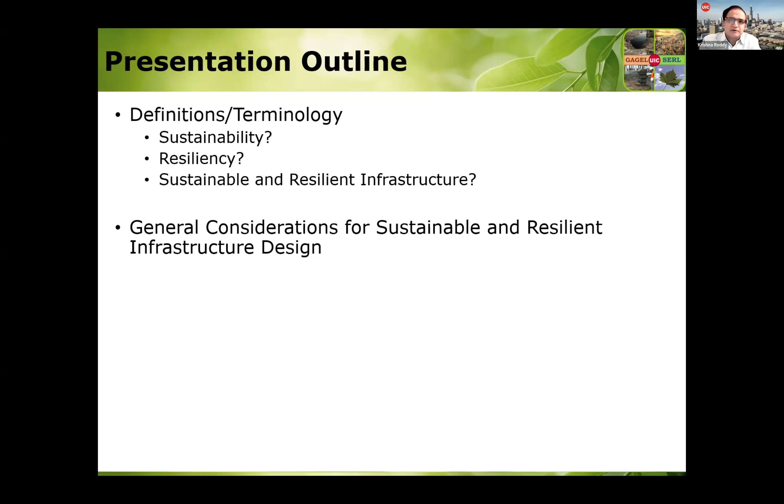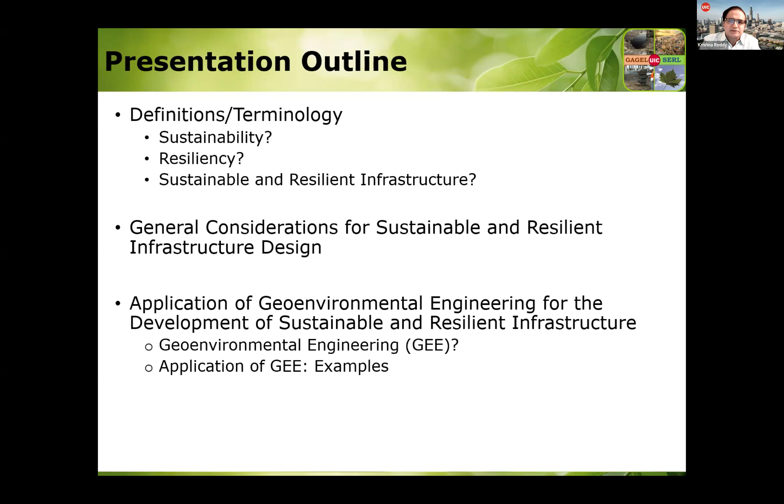Then I'm going to briefly mention the general considerations for sustainable and resilient infrastructure design. After that, I'll focus on how geoenvironmental engineering can be applied towards sustainability and resiliency in infrastructure. I'll explain very briefly what geoenvironmental engineering is, and then give you several examples of how it can be applied towards sustainable and resilient infrastructure. Then I have a brief closing comment. So this is the agenda.

So, sustainability - what is the definition of sustainability? In one of my papers, I have given more than a dozen definitions of what sustainability is, and you can find many more than that. But the one that people use commonly is this definition, which I think everybody knows: meeting the needs of the present without compromising the ability of future generations to meet their own needs. This is very brief, succinct, and very powerful, but it does not really tell what needs to be done to achieve this.

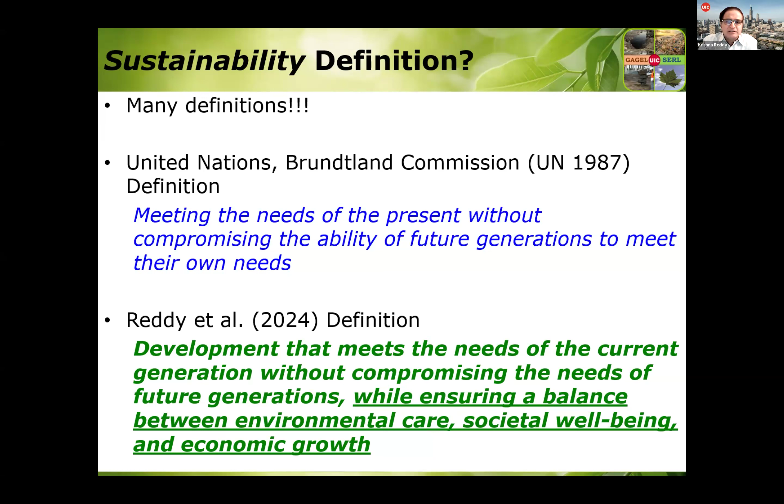So what I did is add the last part that I underlined, so you can achieve it: meeting the needs of the current generation without compromising the needs of future generations, while ensuring a balance between environmental care, societal well-being, and economic growth. In order to accomplish that broader goal, you need to balance these three aspects: environment, society, and economic. This is popularly known as the triple bottom line. I'm sure you have seen the Venn diagram that shows all three elements, basically optimizing the positives of all three.

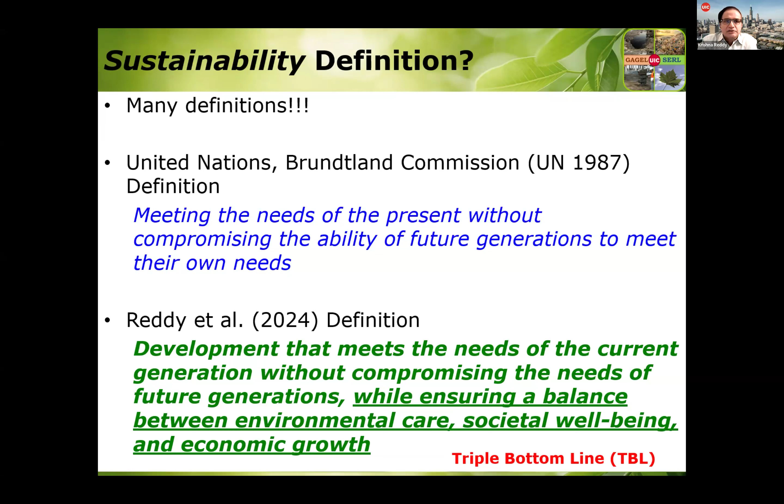So why are we so concerned about sustainability these days than before? We have all these issues: natural resource depletion, growing environmental pollution, increasing population, increasing waste generation, increasing greenhouse gases, declining ecosystems, loss of biodiversity, social injustice, urban sprawl, and many more. All these things are getting worse and worse as time passes, so we cannot let this situation continue. Conditions for current generations are becoming difficult, and it's definitely going to be a very problematic situation for future generations.

So that's where the concept of sustainability comes into the picture, and the UN has developed Sustainable Development Goals. They said, hey, we need to address these issues and should aim to do something. They specified 17 goals, with specific targets under each goal, and you can monitor country-wise how these targets are being achieved. This gives us a good framework at a global level on what can be done towards sustainability and reverse the problems we have been having. So quantifying sustainability is very important, because you just don't want to say whatever I'm doing is sustainable.

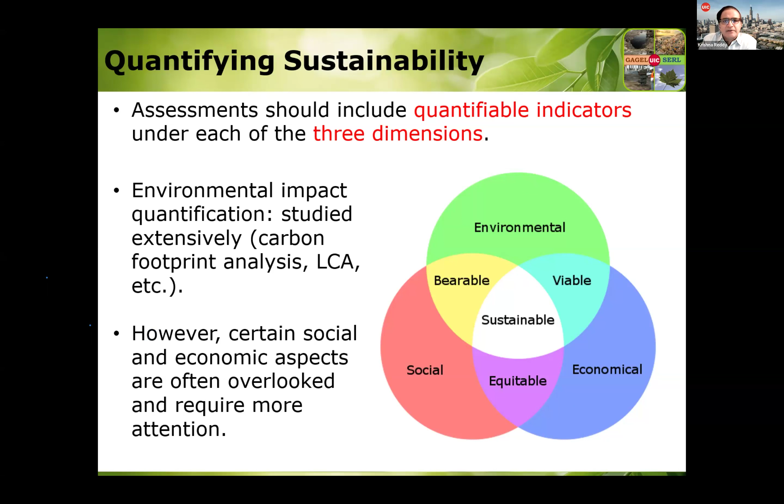So our research is aimed at developing the frameworks and identifying the indicators, identifying the metrics, and how you combine all of them into what's called a sustainability index. I'm not going to talk about that here, but you can look at my papers that show the framework and how you quantify sustainability.

So let's look at another buzzword that people use: resilience. Again, there are many definitions for resilience. The paper that I mentioned has more than a dozen definitions. But being in civil engineering, we look at ASCE, and ASCE has given this definition: the ability to plan, prepare for, mitigate, and adapt to changing conditions from hazards to enable rapid recovery of physical, social, economic, and ecological infrastructure. So the main thing is changing conditions from hazards, and addressing, mitigating, and adapting to those issues.

There is another reputed agency in the US called the National Research Council, and they have given a brief definition: the ability to prepare and plan for, absorb, recover from, and more successfully adapt to adverse events. So the buzzword here is adverse events. When adverse events happen, you don't want to have a catastrophe and loss of life, loss of property. You want to be able to recover from that and successfully adapt if such situations happen again in the future.

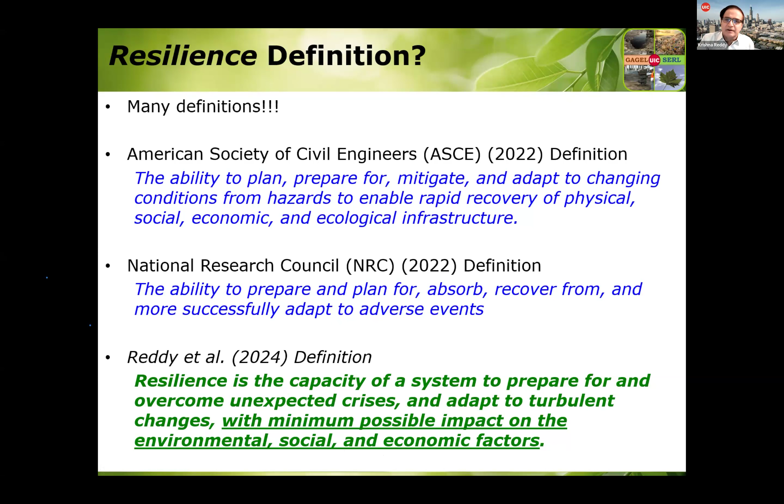So whatever system you are working on should cope with the unexpected crisis or adverse events. But at the same time, we want to make sure these environmental, social, and economic impacts are considered. So just like sustainability, why are we concerned about resiliency?

I'm talking about changing conditions. The changing conditions or adverse events could be anything. It could be a sudden economic disaster, or a drastic political situation, or, more commonly, engineers are talking about changing climate. As you see the climate impacts, some places are extremely dry, some extremely cold, and you have a lot of hurricanes, a lot of tornadoes. Sea level rise, increased surge, all these things contribute to climate change.

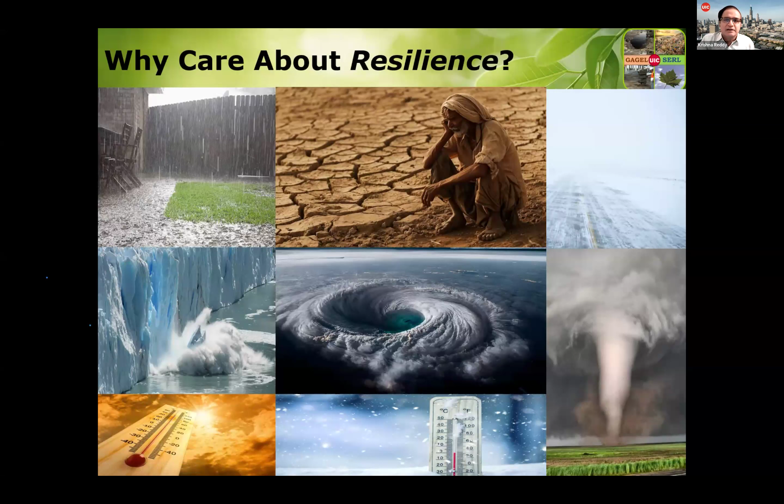This climate change and extreme weather events are observed everywhere on the planet, and they're creating havoc in many situations. In the US right now, the entire California area is burning, we have a lot of wildfires, that's become a very big problem. A lot of places have extreme flooding, and a lot of hurricanes, more than usual, causing a lot of damage. All this excess rain, precipitation, and storm events are causing all kinds of geohazards and consequent damages.

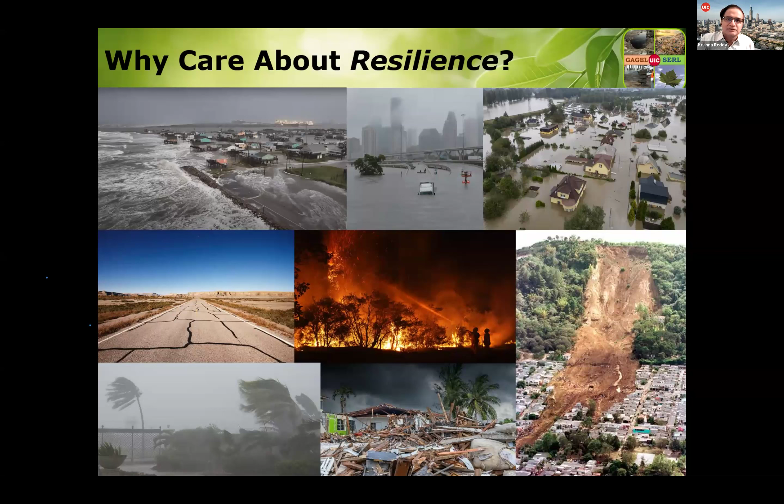So you don't let these things happen and impact the people and the surrounding environment. These things are happening more and more, like what I mentioned about sustainability drivers. These are all changing conditions happening more and more, and we cannot sit tight and do nothing, so we have to act on these things. That's where considering resiliency becomes important. Quantifying resiliency is also important. You cannot just say your system is resilient and go with it, but show me how resilient your system is.

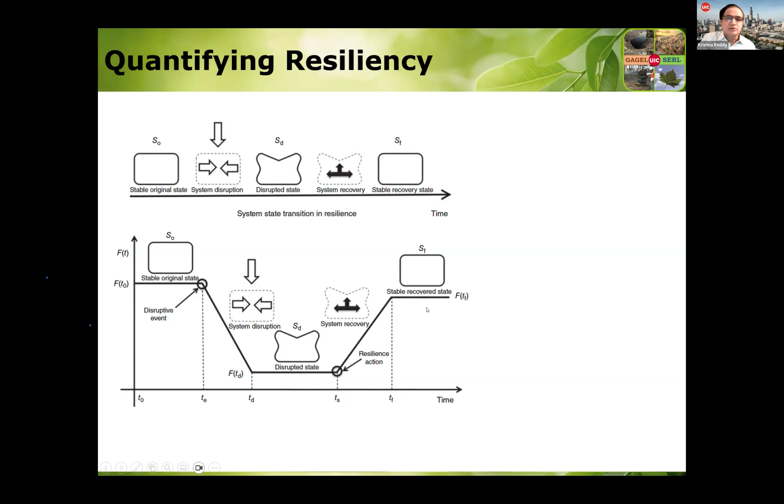So resiliency is all about, you have designed certain things and it's performing, but if an unexpected event happens, you're going to compromise the performance. You're going to disrupt the system, and that disrupted system may exist for a while, and then you may be doing some adaptation, or the system itself could be adapting and recovering the performance, maybe reaching a stable recovery state, which may not be the same as the original state, but at least an acceptable state to continue on. So basically we call this technical resiliency.

This can be calculated through engineering analysis, modeling. A lot of advanced modeling can be done to look at how much the performance loss is, how long it's going to take, how long it's going to be in a disrupted state, how long it's going to take to recover, and what the recovery state will be. So all these things could be calculated through engineering analysis to see how the technical resiliency is.

And if the system that you have is not resilient, for example if the loss is so much that you have a catastrophe, then you have to do something to the system, to evaluate some adapting strategies, so that you have this resiliency. Resiliency is all about recovering back to some acceptable performance conditions.

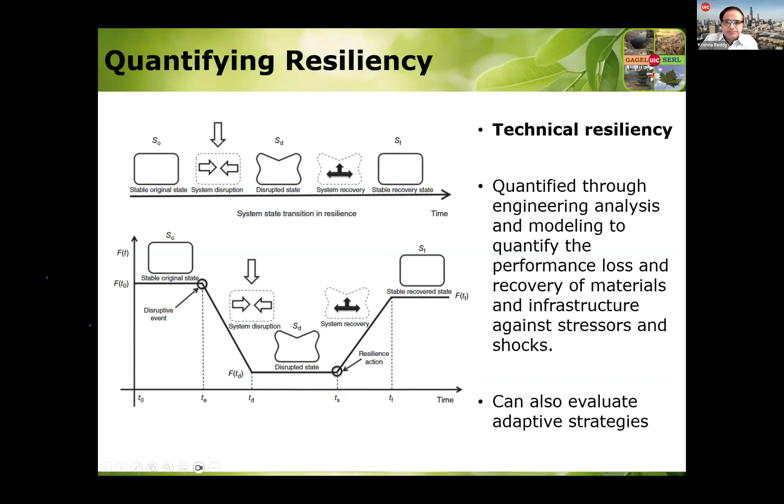So again, both sustainability and resiliency are important because of changing conditions that are happening in the short term, and we need to look at the long-term survivability, that is sustainability. So hopefully you understood what these two terms mean, sustainability and resiliency. Now let's get into the infrastructure.

So when you talk about civil infrastructure, ASCE groups all the civil infrastructure into almost 17 different categories. And as a civil engineer, you may be a specialist in environmental, structures, transportation, or geotechnical, whatever. So you will be working in all these kinds of projects.

In the US, ASCE rates the infrastructure, gives the score, and grades are given. This is from 2021, I think the next one is coming up next year. So these are the grades. The US infrastructure is pretty old, it has been built a long time ago, and a lot of these things need repairs or reconstruction. That's why the infrastructure rating grades are very low.

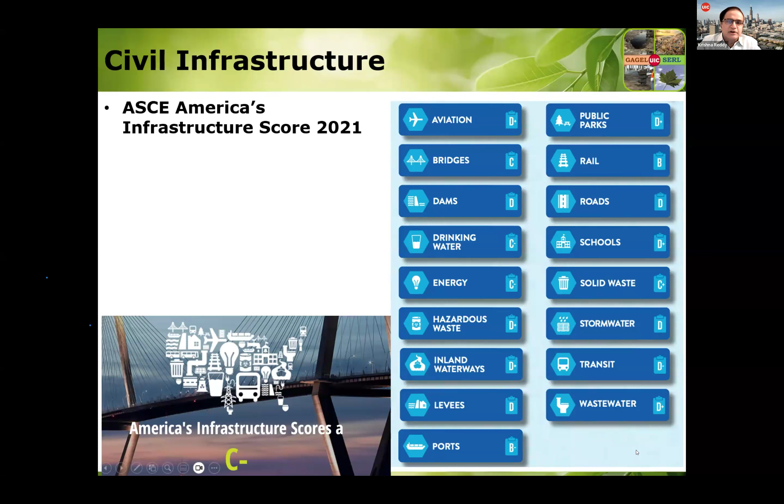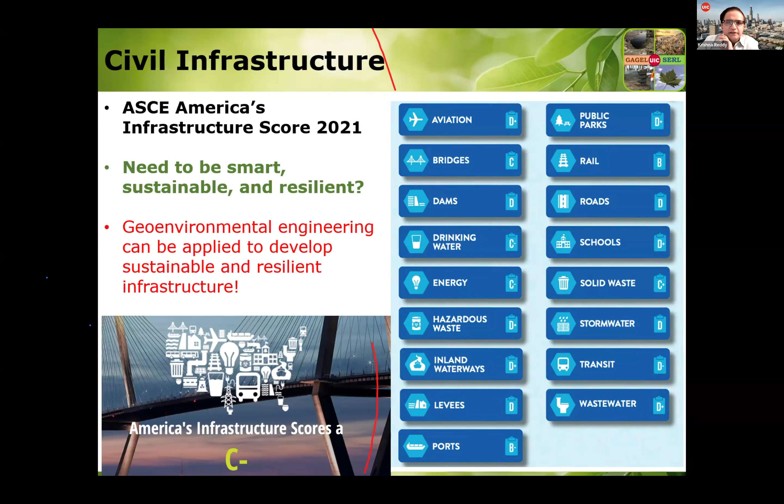So if you are retrofitting or building a new one, what is important is to consider the sustainability and resiliency, and smart, using all the advanced technologies. The geo-environmental engineering can be applied in this effort. So my presentation goal is to show how geo-environmental engineering can help in making the infrastructure sustainable and resilient.

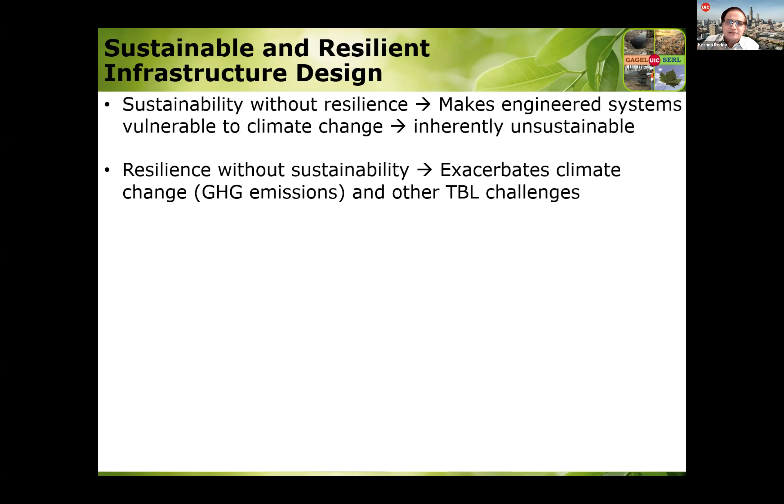And resiliency without sustainability also does not make sense, because if you want to make it resilient and you want to use all the fancy materials that have high carbon footprint, then you're going to have a lot of greenhouse gas emissions. So you're not really addressing the root cause of the climate change. So you have to consider both of them, resiliency and sustainability, so that your systems are safe under the changing conditions that are happening now, and also you are addressing future conditions. You want to look at the sustainable future.

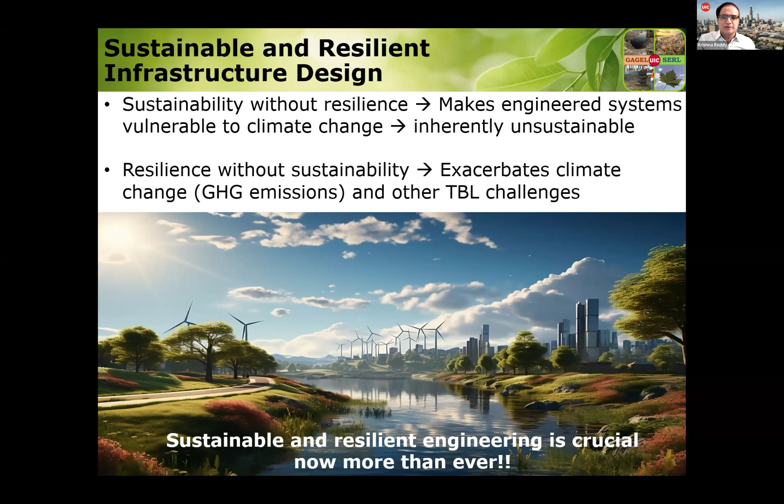So that's why some people use only sustainability, some people use only resiliency, but it is very important because these two terms are quite different, and you need to make sure that you use both of them together, because that shows that you are addressing the changing conditions in the near future, and also looking at the long term, like future generations, from the sustainability perspective.

So what can you do to make infrastructure sustainable and resilient? What kind of things should you look for? So you're a civil engineer, or you're going to design all these systems. What are the things you should look for if you want to make infrastructure sustainable and resilient?

First thing is you need to have a low environmental impact - minimize the emissions, resource extraction, ecological disturbance. And you need to look at energy efficient systems. You don't want to use a lot of energy - more energy means more greenhouse gases and more environmental constraints.

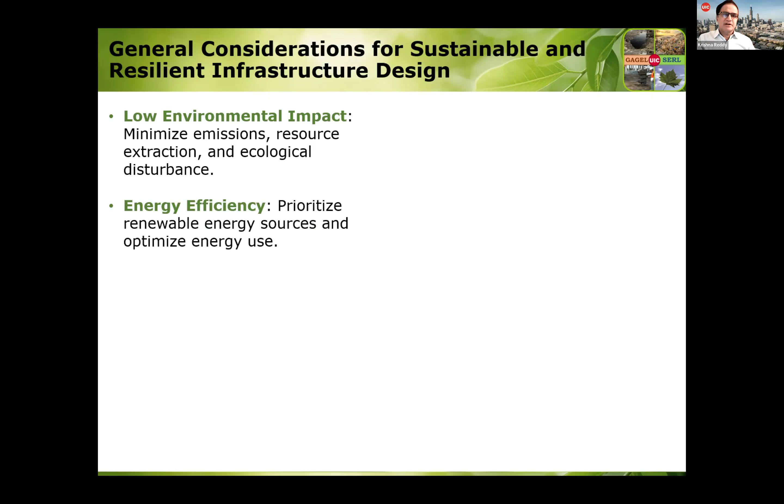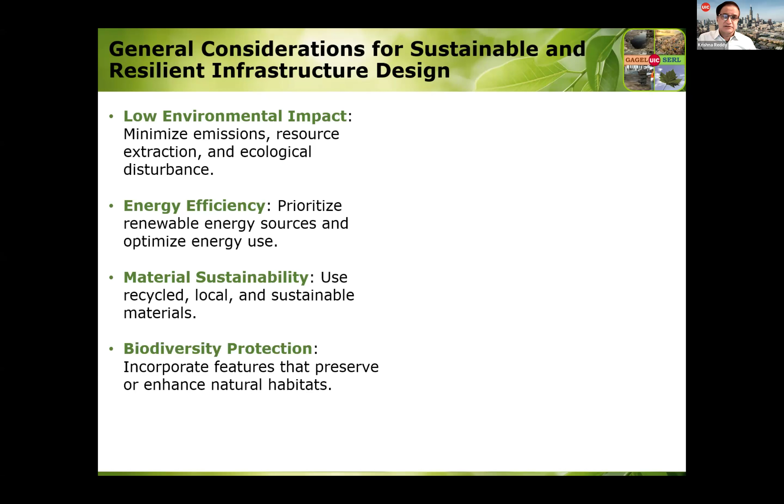And you also want to look at materials sustainability. You cannot use the same materials that you have been using, that really cause the problems that we have. So we need to look at sustainable materials. We need to be looking at biodiversity protection and resilience to extreme events.

This is not in the codes right now. If you just say that you want to follow the codes that are there for the design, then you will not be able to address these things. So this goes beyond the codes, and as a professional ethic, you must consider these things.

And you need to consider the cascading impacts, because whatever resilient technical design you make, that will have implications on environmental, social, and economic aspects. So you need to make sure that those are not sidetracked.

And you need to look at what are the social benefits of doing your infrastructure in the first place, and what are the social benefits of doing it in different ways. That's important to consider.

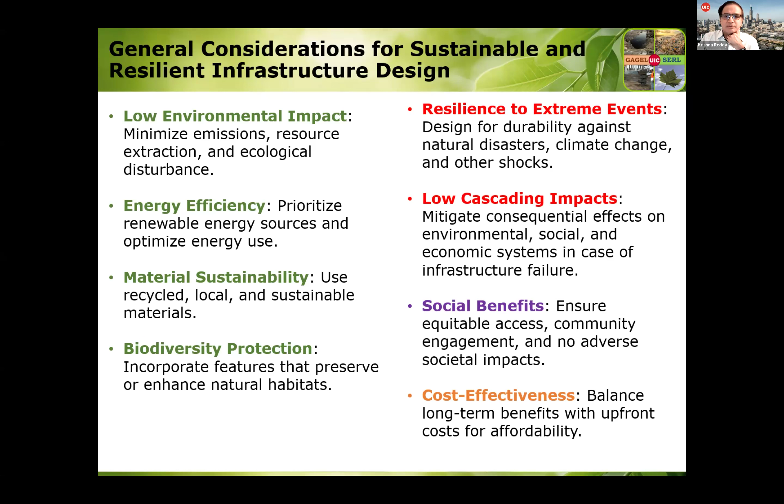And the bottom line is always cost. You don't want to spend more than what you should be doing. A lot of times there is a misconception that sustainable designs are going to be more expensive, but actually it is the opposite - sustainable designs are going to be more economical compared to the standard systems.

Now let's come to the second part: geo-environmental engineering. So we looked at sustainable and resilient infrastructure, and now, in order to achieve that, I said geo-environmental engineering could play a role. And the question is, what is geo-environmental engineering?

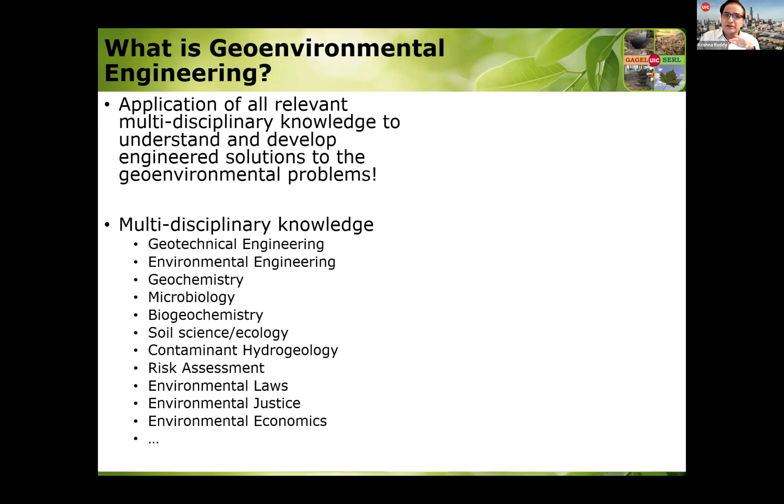A lot of people don't have much idea about it, but basically it is a broader field than our typical specializations. It is multidisciplinary knowledge that you need to develop engineered solutions to geo-environmental problems.

The types of multidisciplinary knowledge you are looking at are geotechnical engineering, environmental engineering, chemistry, biology, contaminant transport, risk assessment, and some idea about environmental laws, environmental justice, environmental economics, and so forth.

So to come up with a holistic engineered solution to a problem, it has to be multidisciplinary. This is the field - geo-environmental engineering is combining this multidisciplinary knowledge to develop a holistic engineering solution.

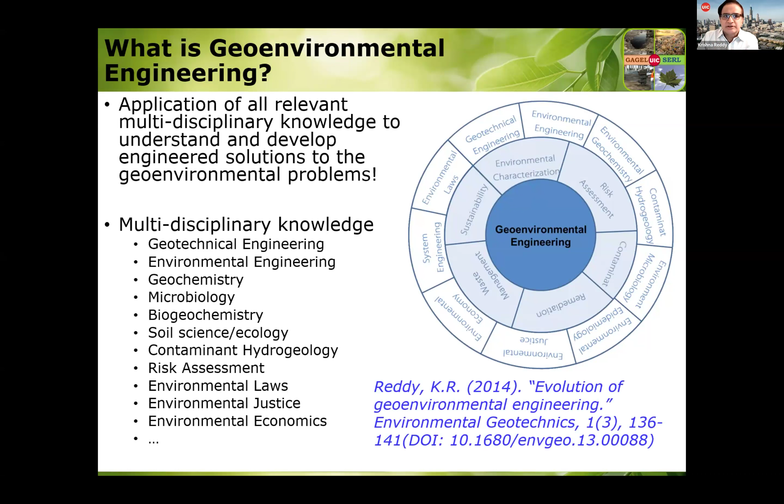If you don't have this, you may be coming up with a solution to only one component of your system. But if you want to look at everything at the systems level holistically, then you need to combine this multidisciplinary background. You can learn more about geo-environmental engineering from an article that I wrote.

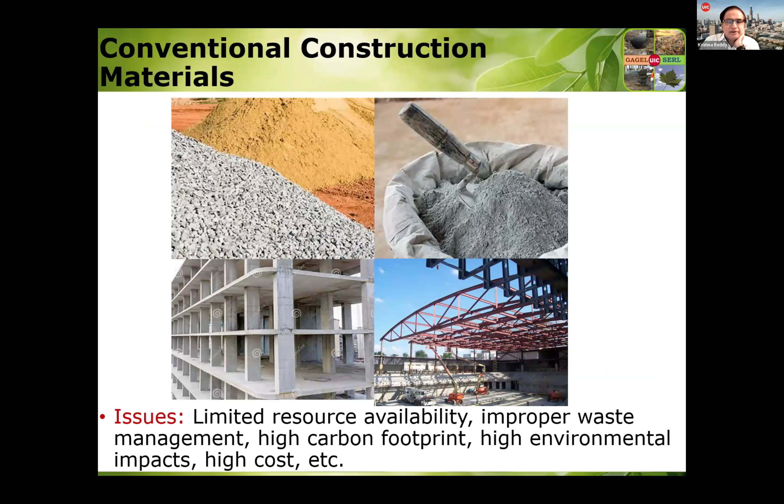So let's go through these examples very quickly, to see how geo-environmental engineering can be applied to make infrastructure systems more sustainable and resilient.

So here are the conventional construction materials - mainly sand, aggregate, cement, concrete, and steel. But now it is well established that the resources for these materials are limited, and moreover we have a lot of improper waste management issues, high carbon footprint, and high environmental impacts.

For example, manufacturing of the cement itself could have a high environmental footprint, and then high cost of these materials. So there's a problem, right? We cannot really have these conventional construction materials being used continuously going into the future.

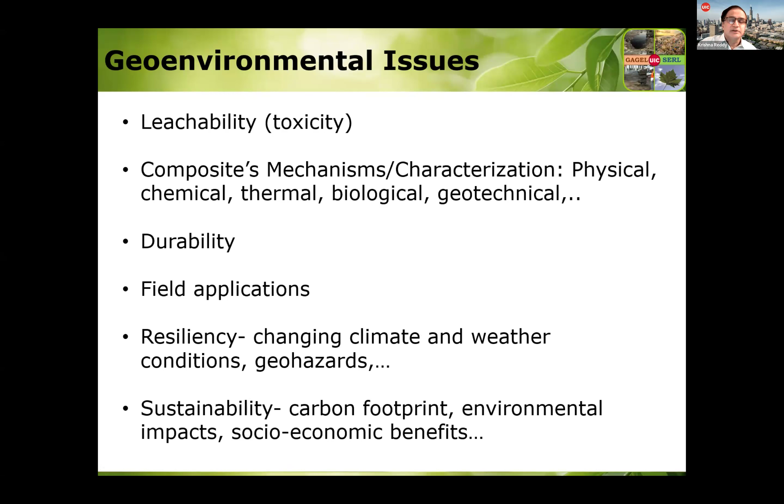So yeah, if you are looking for alternative construction materials using industrial byproducts or waste materials, geo-environmental engineering can become handy to evaluate those materials and their use.

The ground improvement, right? So you probably have taken a course on ground improvement in undergraduate or graduate level in geotechnical engineering. You talk about all these different soil improvement methods, and some of them maybe deep soil mixing, grouting, and all those things. Most of them use cement or lime. So if you look at all these conventional ground improvement methods, they're all resource intensive and energy intensive. They have high carbon footprint, high environmental footprint, and durability is an issue, resiliency is an issue. These are the problems that are making us think differently than these conventional methods.

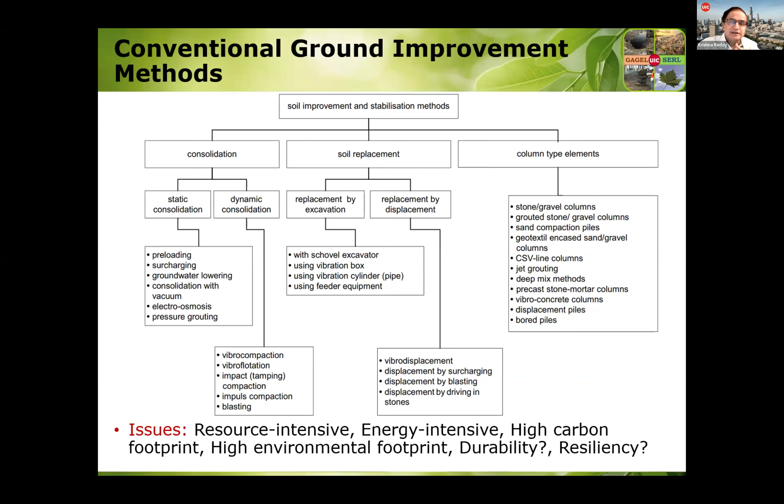So then what are the unconventional methods? What are the methods that we should be looking at?

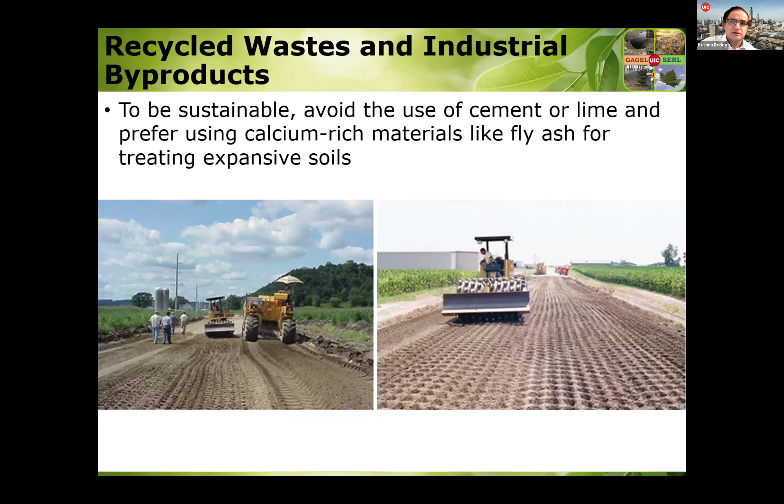Instead of cement and lime, we should be looking at alternative materials like fly ash or any other byproducts that could substitute for cement and lime. If you can substitute cement or lime, then you actually have a lot of benefits in terms of low carbon footprint and, more in general, environmental footprint.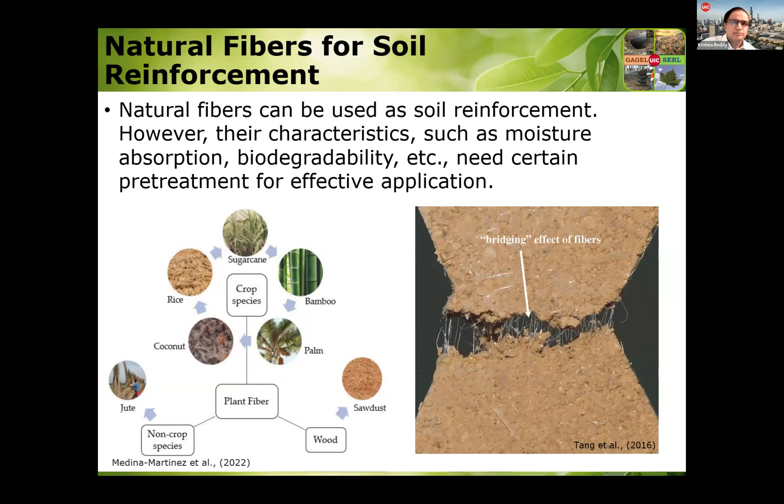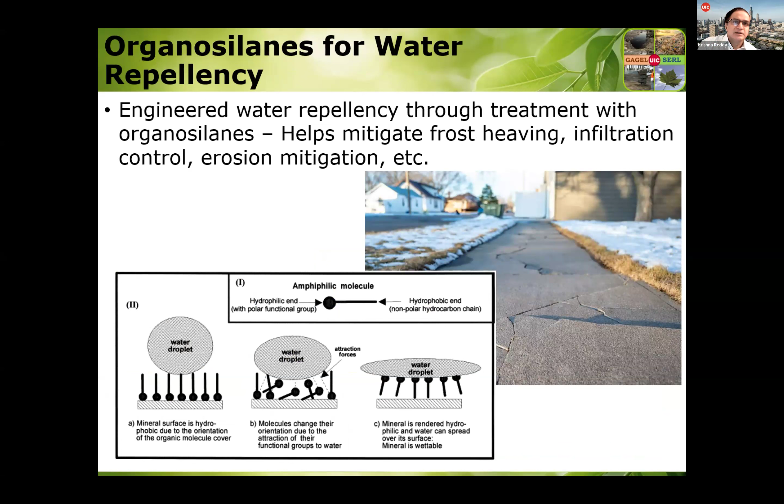Or using natural fibers for soil reinforcement. Again, these are natural materials, and you're not manufacturing them, so the environmental footprint is going to be much, much lower. Natural fibers and geosynthetics can also be an alternative. And if you have issues dealing with frost heaving, or infiltration issues or erosion issues, you can look at alternatives compared to the conventional ground improvement methods, organosilane, or some of the chemicals that people are using.

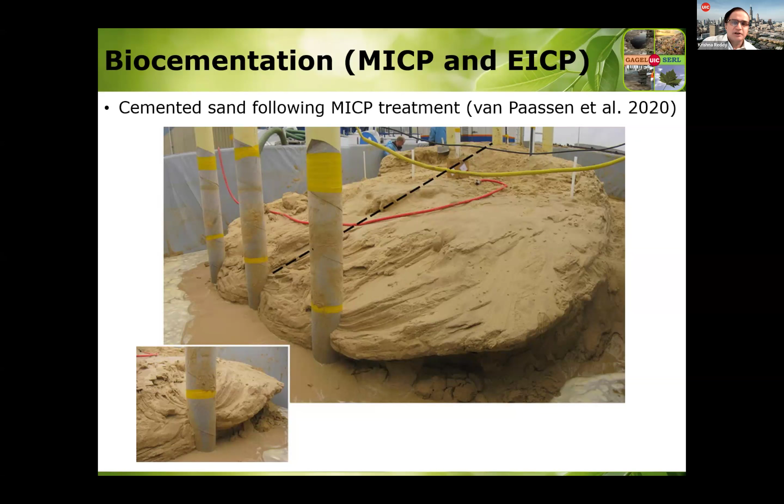And then people are going into bio-based methods for ground improvement. This is MICP and EICP, microbial induced carbonate precipitation techniques, and there are a lot of papers on these things. Basically, if you have sand, you can solidify that by formation of calcium carbonates. As a result, liquefaction resistance is going to be increased, and the strength is going to be increased, and so forth. So instead of adding cement, you're using biological processes to cement the sand.

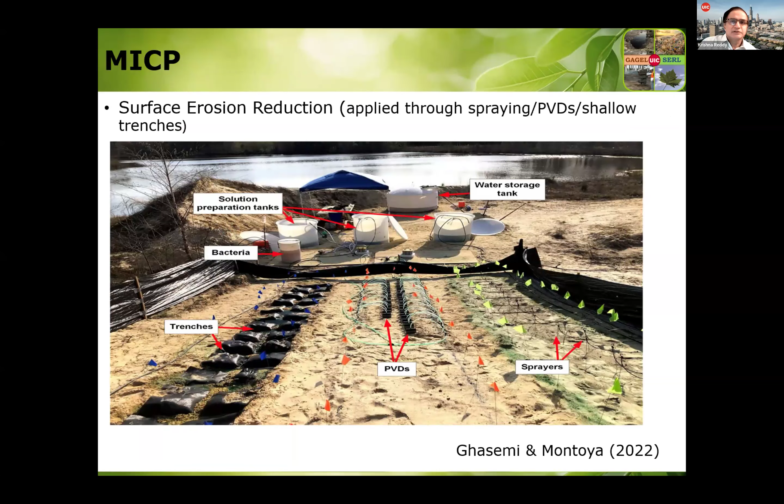And you could do it on the surface for erosion reduction. So this is, again, not a conventional method. It's an unconventional method, and you can use different types of biological approaches for erosion or soil stabilization.

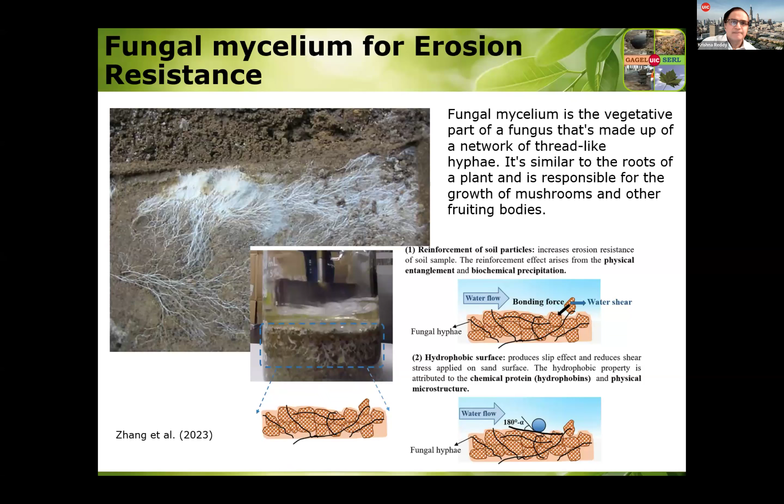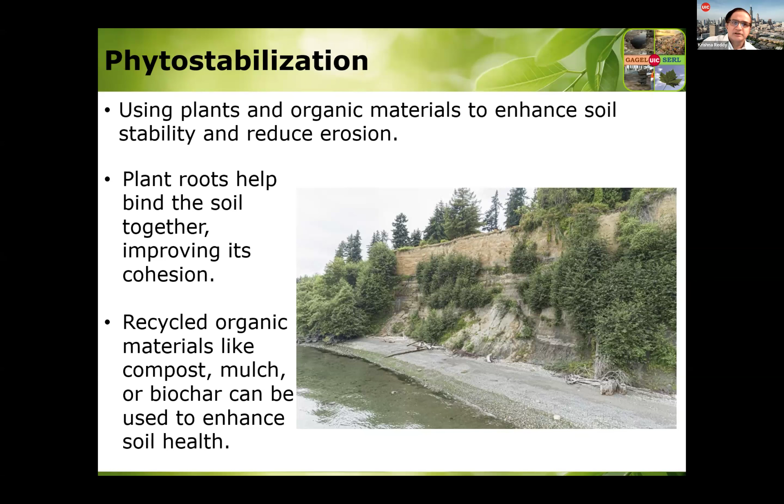And instead of microbes, you can look at plants to stabilize the slopes. It is called phytostabilization, and the plant's roots can help increase the shear strength, so slopes can be much more stable. To make these plants grow, you may have to do some organic amendment using compost or biochar or something like that. So these are not conventional ways of stabilizing the slopes, rather using plants to stabilize. This is, again, more sustainable, and also more resilient to changing conditions.

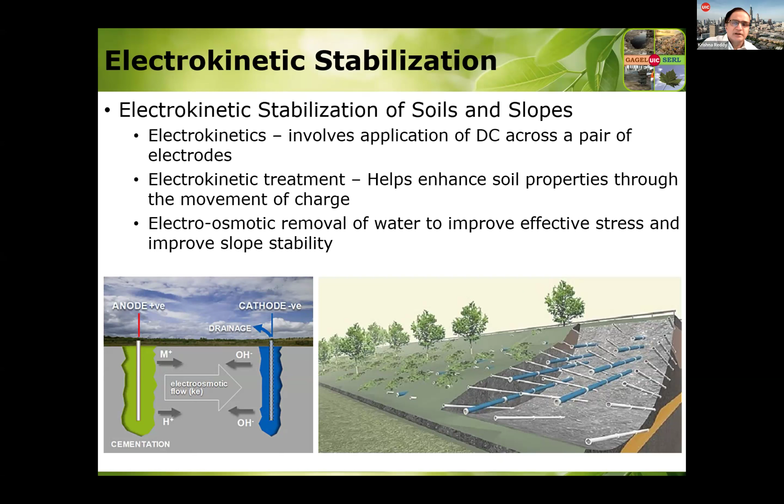The other one, not a conventional method, is electrokinetic stabilization, where you apply a small electric potential, and then you can dewater and increase the strength of clay type soils. Again, you need small power, DC power, which could be provided by solar energy. So it's very simple compared to conventional methods, and it has all kinds of sustainability and resiliency benefits.

So in ground improvement methods, if you want to use anything other than conventional methods, you need to have some good understanding of the geo-environmental issues. So I'm listing all those things. You need to understand the fundamental processes. If you are dealing with chemical, biological, electrical, or plant-based approaches, you need to understand the coupled processes that are leading to the final result of your soil stabilization.

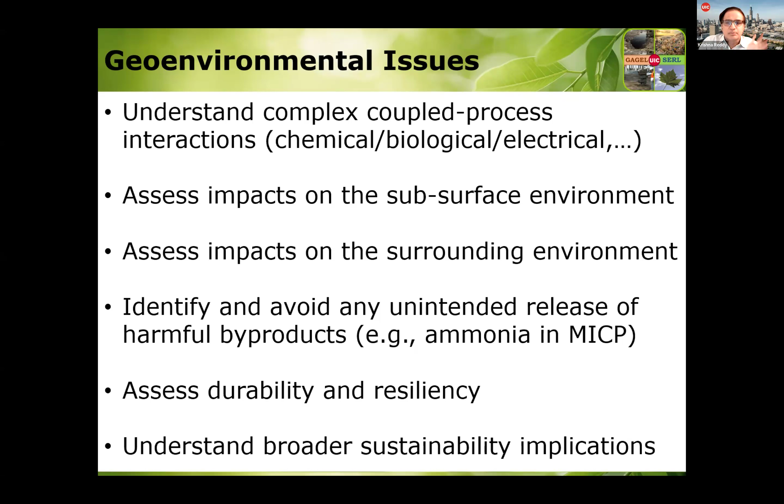So that, again, is beyond traditional geotechnical engineering. You need to look at the effect on the subsurface, the effect on the surrounding environment. And in all these things, you need to look at any kind of unintended negative impacts, what is the long-term durability, what is the resiliency, and what are the broader sustainability implications. So a lot of geo-environmental engineering issues need to be addressed when you shift your approaches from conventional to some of these new and emerging techniques.

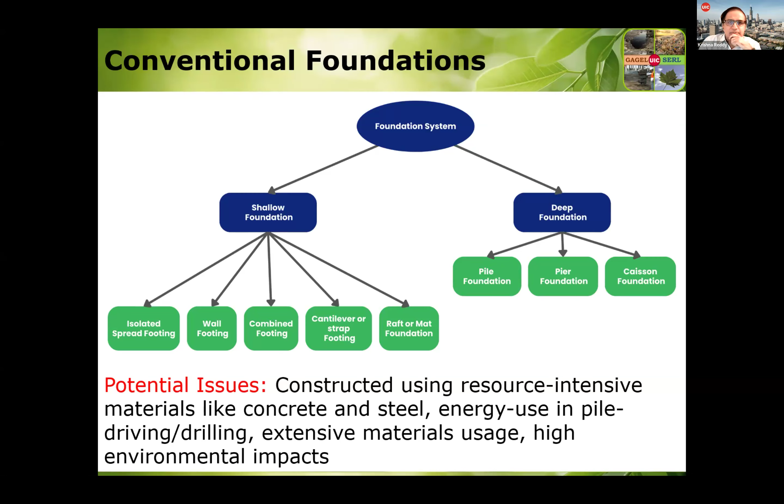Foundations and earth retaining structures: again, you have all these conventional foundation systems, but many of them, just like other conventional infrastructure systems, use a lot of steel and concrete, so they're not environmentally sustainable because of high carbon footprint. And there are a lot of retaining structures that again use concrete and steel. Again, they are resource intensive and have high carbon footprint.

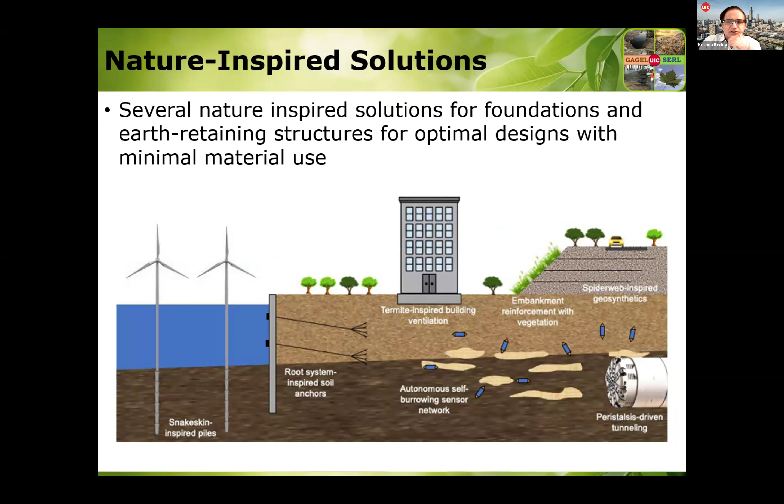So now, to avoid those things, to make the systems more sustainable and resilient, nature-inspired solutions are being considered. A lot of research is going on in terms of alternative foundations and alternative retaining systems. For example, energy foundations is one approach where they are trying to harvest geothermal energy using the foundation systems.

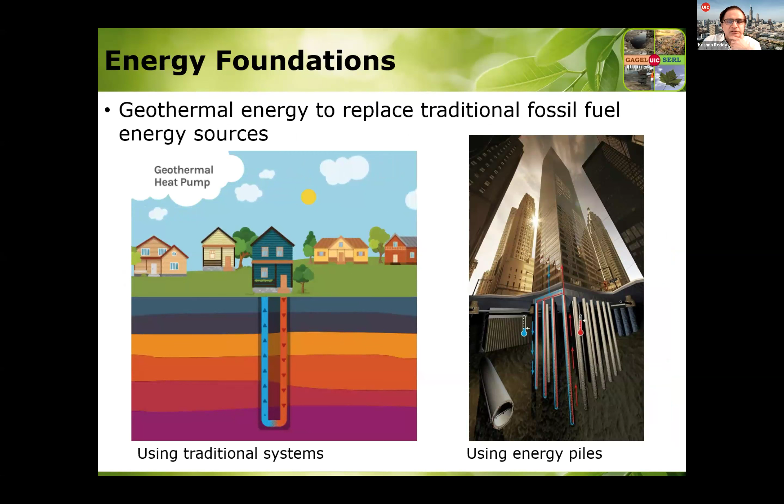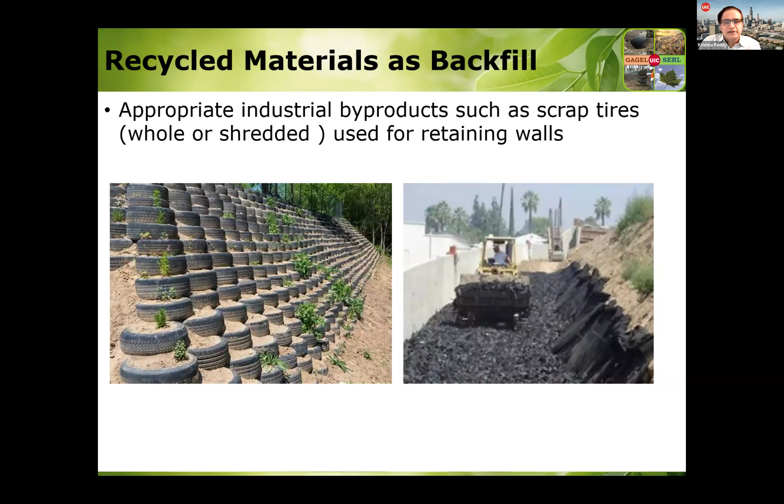And instead of conventional reinforced concrete or steel sheet pile walls, now there are ways to use waste materials and create these alternate retaining wall systems. So again, you are utilizing waste materials, as a result reducing waste, and creating systems that are more sustainable and also more resilient for changing conditions. So again, you are going away from the traditional systems, so you need to have these geo-environmental issues addressed.

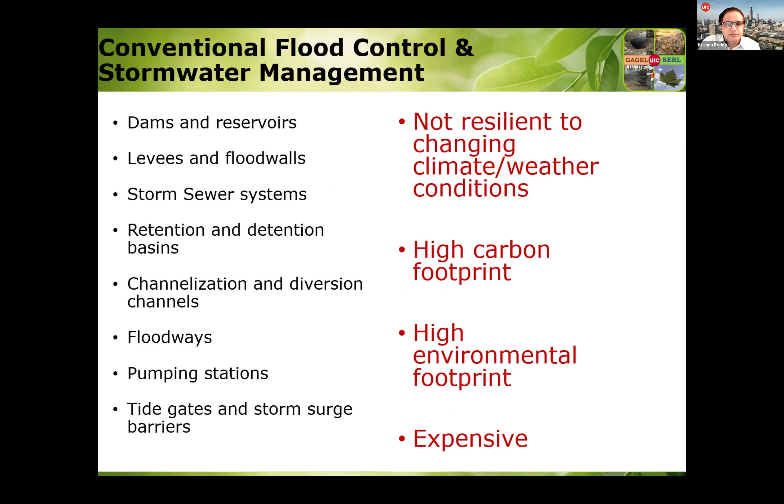In terms of flood control and stormwater management, we use traditional civil engineering systems, but they are not resilient to changing climate and weather conditions, have a high carbon footprint and high environmental footprint, and they are expensive.

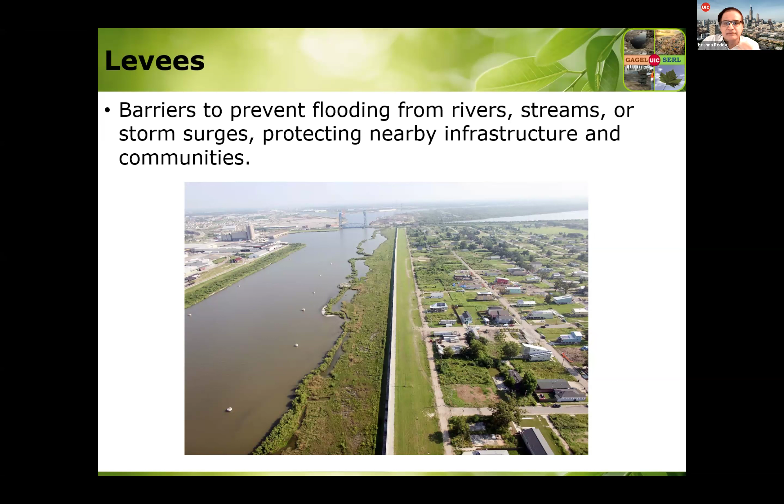As an alternative, especially for levees, there's a lot of work going on. Levees are basically barriers in different forms, aimed at protecting nearby infrastructure and communities, especially when you have rivers, streams, or coastal areas.

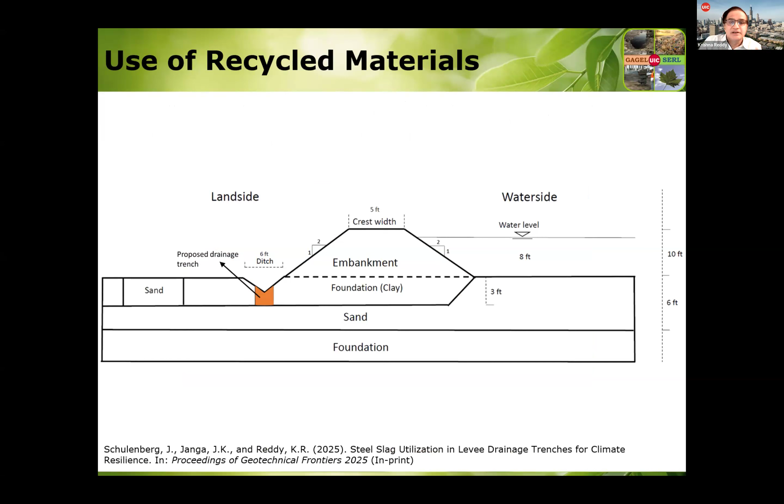Recently we did some work on how to make existing levees more resilient to changing conditions. For example, if you have a high storm and water levels are more than what you expected in your previous designs, a stability analysis could reveal slope stability problems or piping problems. How do you fix those things?

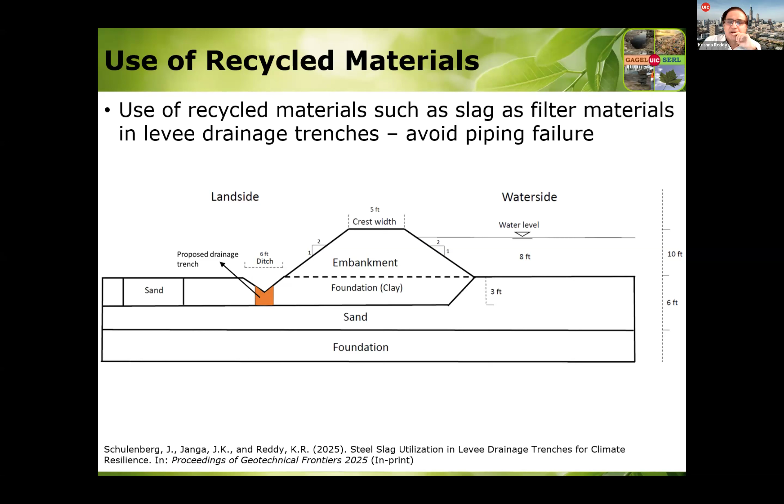In our case study, we actually used slag as a filter material to try to address the potential piping failure issue. Likewise, a lot of people are using geonaturals for slope stabilization of these levees.

In some cases, they want to avoid using these levee systems, so they are creating floodable parks. If you have a coastal area, you don't want any permanent infrastructure; rather, you want a park. If there is no issue, the park can be a beautiful place for people to go and enjoy.

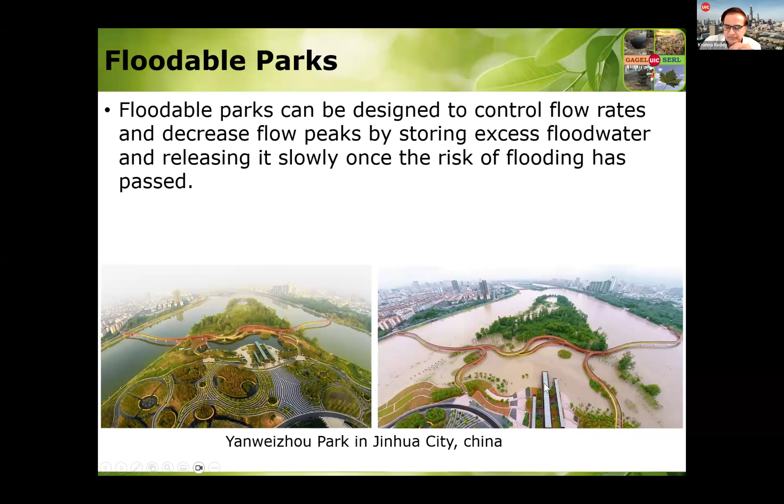But if there's an extreme storm or a flood event, the park gets flooded, but that's okay - people go home. There's no permanent infrastructure to get damaged, so when it recedes, you don't have any problem. So a lot of coastal areas, rather than putting in a levee or flood wall, are constructing these floodable parks. This infrastructure makes it sustainable and resilient.

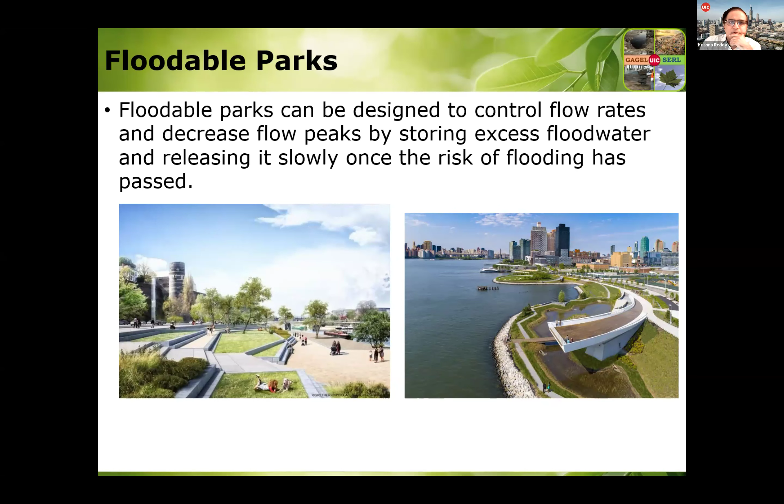If you had a levee, you would be worried about damage to it. There are a lot of geo-environmental issues associated with these systems - anytime you use recycled materials or waste materials, all kinds of geo-environmental issues come into picture, like how the surroundings will be affected by using these alternative systems, and the plants and trees.

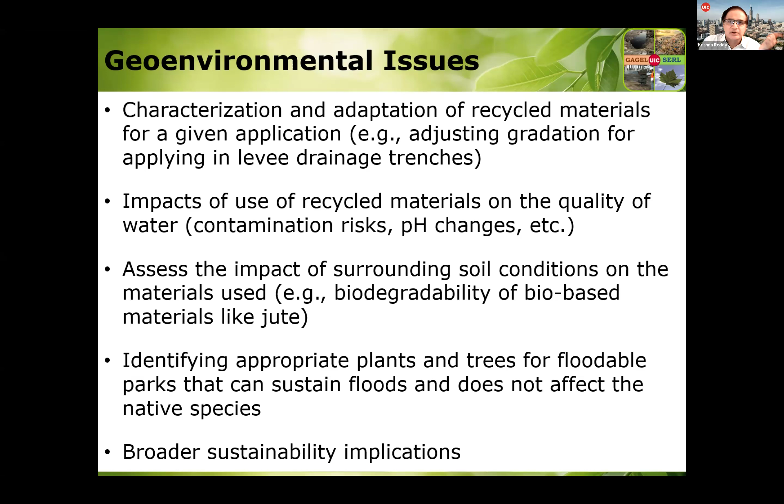Floodable parks are a kind of new concept to civil engineers. How do we address those things, and how do we say that these are sustainable? We need to quantify these impacts and see how sustainable they really are.

Civil engineers also work on stormwater systems, basically the sewer system - a network of manholes and pipes that discharge into rivers or detention ponds. But those kinds of systems are considered to be inadequate or not sustainable, not resilient.

So now green infrastructure is being promoted, and a lot of geotechnical and civil engineers are involved in designing these things - bioswales, rain gardens, permeable pavements, or green roofs. These are nice systems where you're allowing infiltration of rainwater that can benefit groundwater recharge, and you're not creating stormwater.

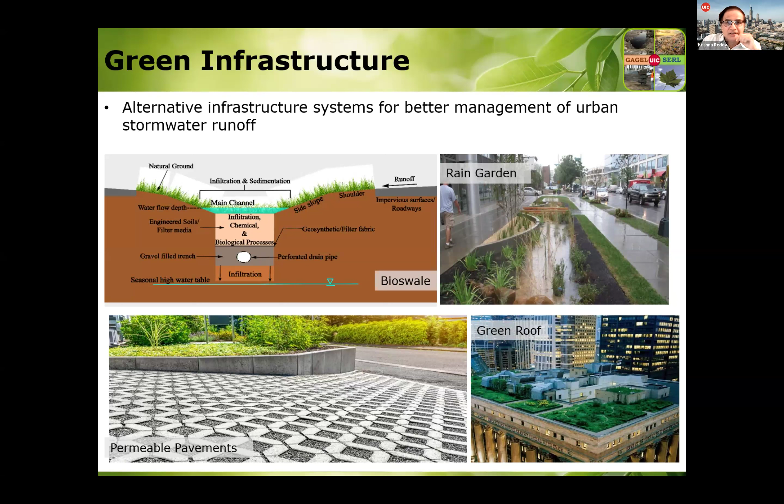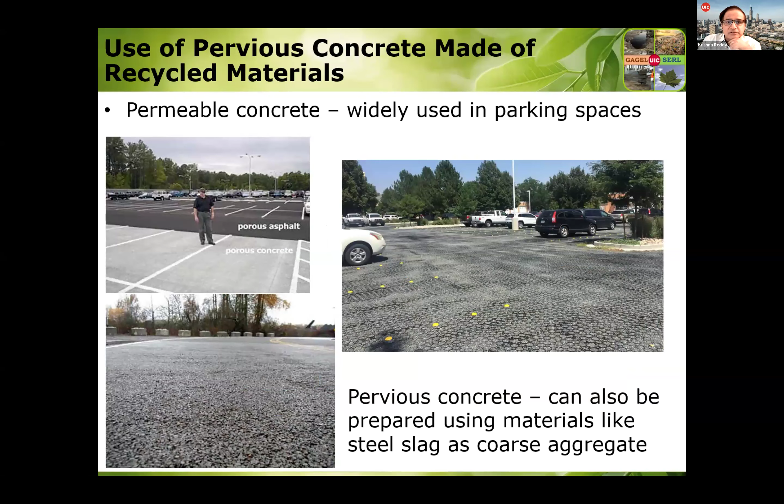One of the problems is that stormwater could be contaminated, so creating a filter within these systems is extremely important, to remove the contamination before you infiltrate the water into the surroundings. A lot of waste materials are being used to create permeable concrete pavements, and a lot of organic materials are used in green roofs. So a lot of interesting things are going on.

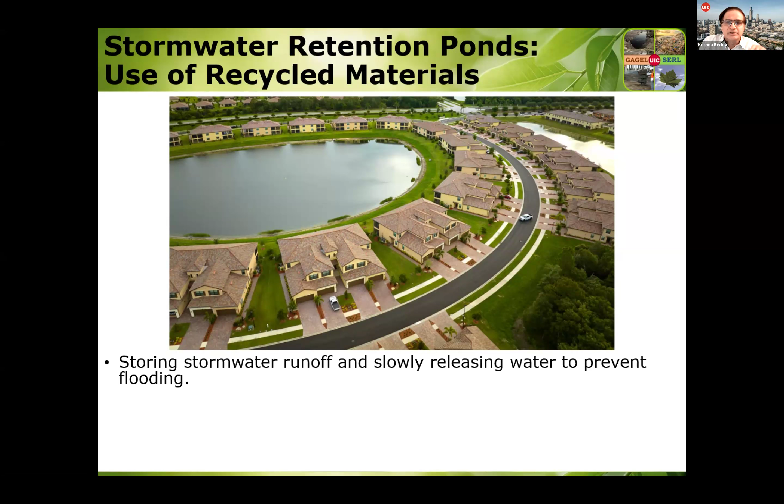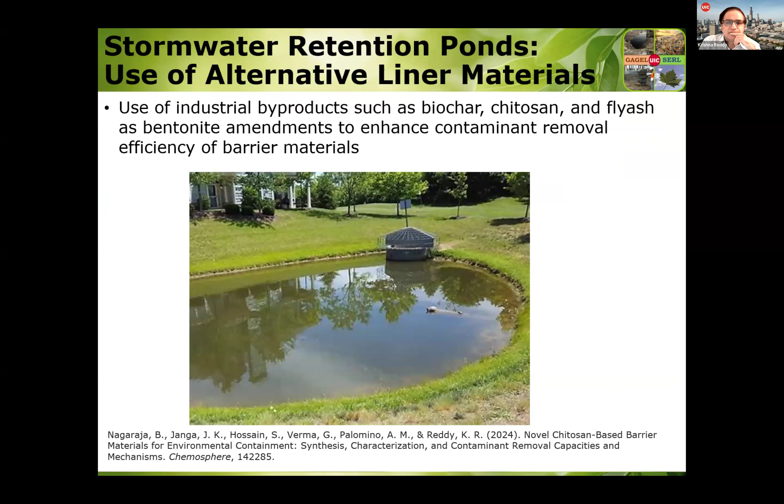Now we are looking at how do we put liner systems in the bottom. We are looking at a project on what kind of liner system we need for these retention ponds, so that the contamination does not infiltrate into the groundwater and cause groundwater contamination.

So all kinds of geo-environmental issues arise whenever recycled materials are used - leachability, how it affects the surrounding environment, how plant species could be affected, and looking at the broader sustainability impacts. If you are thinking about these alternative systems, you need to look at all these geo-environmental issues and make sure these systems don't cause any adverse impacts.

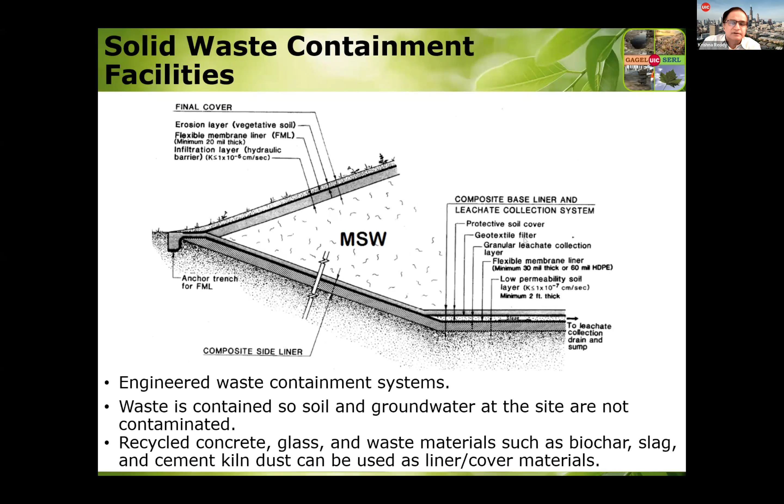It's important to look at these systems from fundamental perspectives. Waste containment systems, like landfills, are engineered systems mainly to prevent soil and groundwater pollution, and a lot of materials are being used in the construction of liners and cover systems.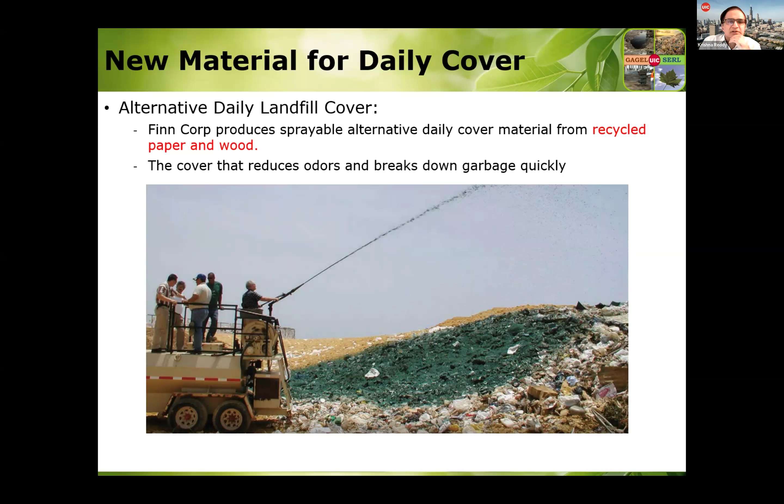If you have liquid waste, these are called surface impoundments, and a lot of innovative liner systems are being proposed for their construction. Every time you dispose of waste, every day you have to put a daily cover, and there are a lot of different alternatives coming for use as a cover, as well as different types of liner systems using combinations of different industrial byproducts.

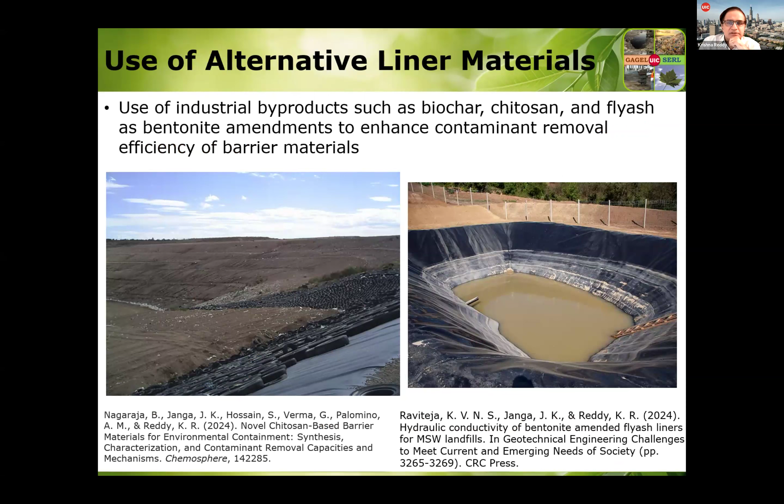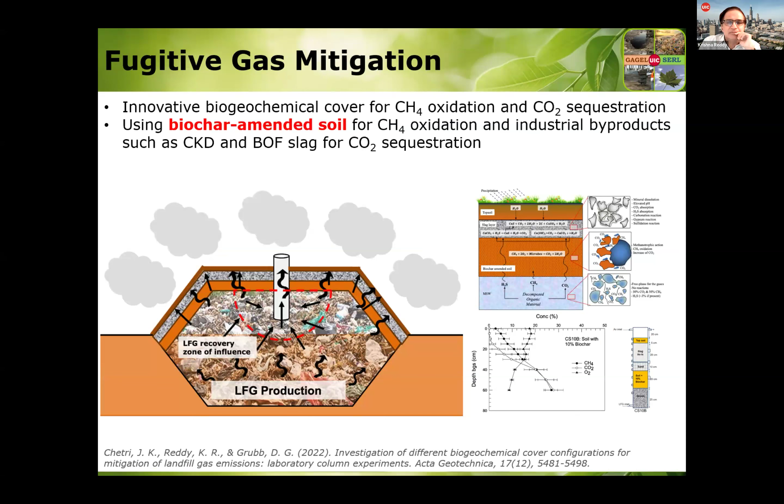Better than the conventional liner systems or cover systems. And if you have a waste that degrades, you're going to get gases, and these gases are greenhouse gases. How do you control that? You can create biogeochemical cover systems so that the gases are trapped. And these landfills produce gas that could be collected, and you could create energy out of it.

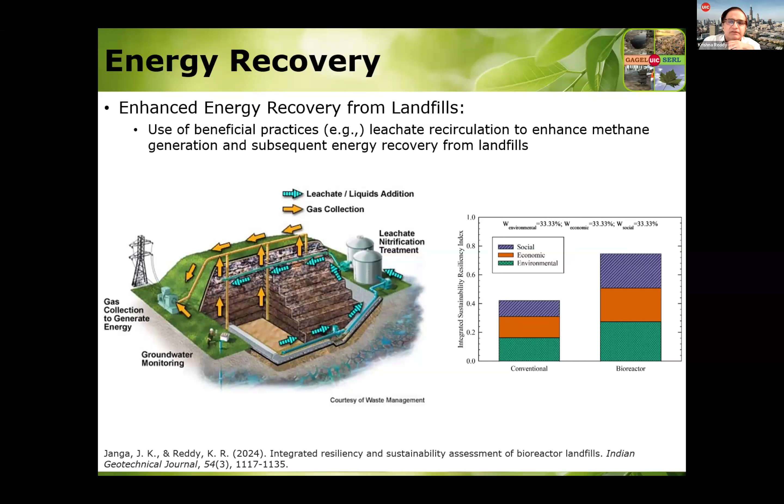And if you're not getting enough gas, there's a system called leachate recirculation to accelerate the degradation and get a substantial amount of gas that could be converted into energy. We did a study, and this kind of approach can really lead to both sustainability and resiliency.

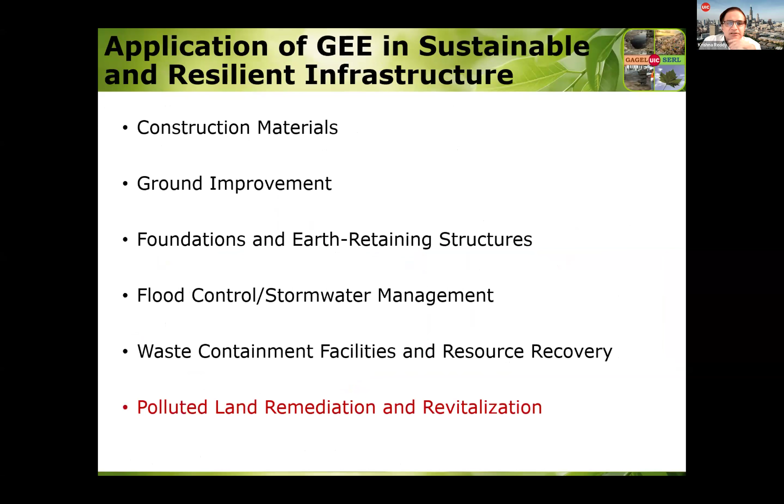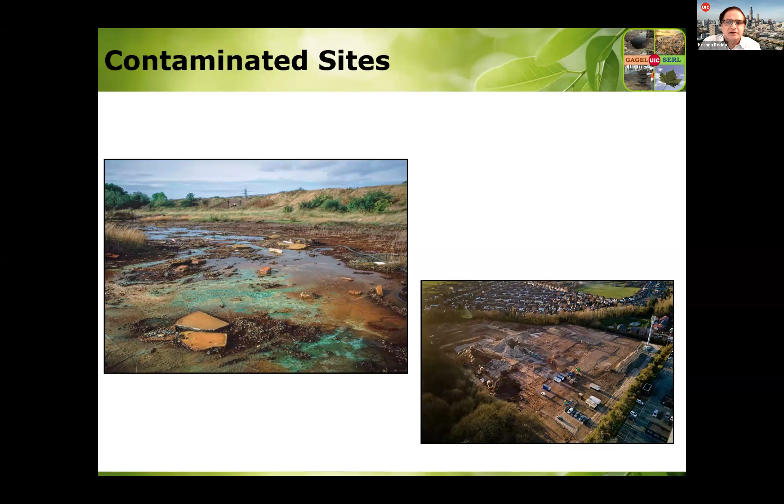So when you're dealing with waste containment systems, there are all kinds of geo-environmental issues dealing with these systems. Lastly, polluted land remediation and revitalization. If a site is contaminated like this one, you cannot really use this site for any purpose. In the US, we have environmental laws that require the responsible party to clean up these kinds of sites. And if you can clean up these sites, they can be used for some beneficial purpose.

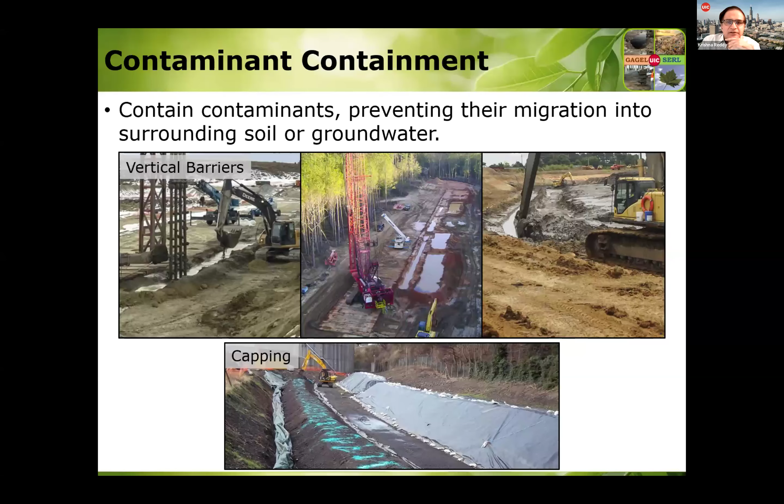How do you clean up? There are a lot of different ways to clean up. All those things are studied in geo-environmental engineering. You could have waste containment systems where you put in a slurry wall type structure where contamination is not allowed to migrate more than where it is now, and manage that contamination. And then you can develop the site simultaneously.

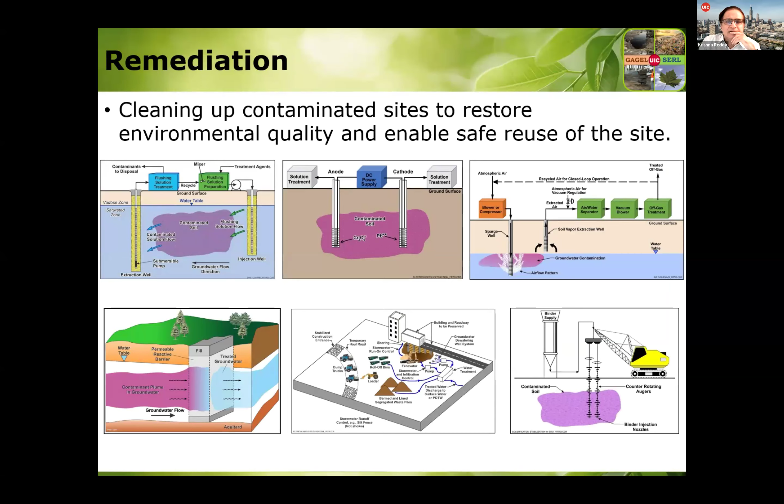There are a lot of technologies to clean up soil and groundwater. Again, those all need to be engineered, and the geo-environmental aspects—looking at the soil, the chemistry, the biology, the hydrogeology—all come into play, to make these systems more sustainable and resilient.

You have bioremediation, phytoremediation—very fascinating ways to clean up soils and groundwater. They are much more sustainable and resilient compared to traditional physico-chemical methods that we have. So the whole idea is you don't want that land to be idle and the pollution to be causing problems to humans, the surrounding community, and the environment. If you clean up, you can build something on that land, and it will lead to a lot of socio-economic benefits.

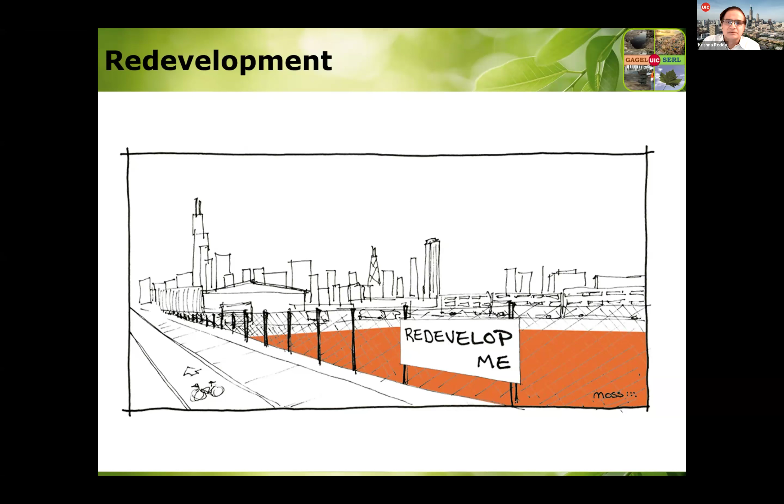So that's all, the final goal is sustainable development. Those are all the examples. I could go on into giving more details, but my whole idea was to explain first what sustainability and resiliency are, what sustainable and resilient infrastructure is, and what kind of things we should be looking at in the design of those systems. And then I gave you examples of what kind of things you could consider in your infrastructure design to make those sustainable and resilient.

And then I was telling you that in all these projects, some geo-environmental aspects become important—chemistry, biology, soil interactions become very important. And geo-environmental engineering, that way, comes to very good use in developing these systems.

So just to close: we are having population growth, waste generation is increasing, resources are depleting, climate change is happening, and we cannot have a status quo and go with whatever we have been doing. So we really need sustainable and resilient infrastructure. And one thing I want to mention is, don't let people use these as buzzwords and sell the same old stuff. You need to emphasize having them calculate the sustainability and resiliency to demonstrate they are really sustainable and really resilient. So that's where these frameworks and methodologies become very important.

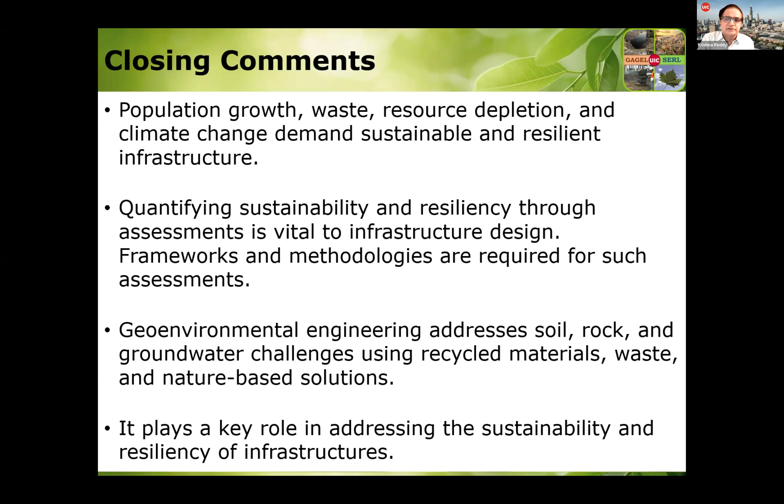And as I mentioned, in looking at alternative infrastructure systems, you will be using different materials, different approaches, more based on nature. In those scenarios, geo-environmental engineering becomes very important. And all these systems, in general, lead to sustainable and resilient infrastructure. So using nature-based, waste, and recycled materials in infrastructure systems will definitely help toward sustainability in infrastructure. If based on nature, they're more resilient compared to conventional systems. So there are a lot of research opportunities in any field you're looking at—civil engineering, geo-environmental engineering, geotechnical, or water resources, transportation.

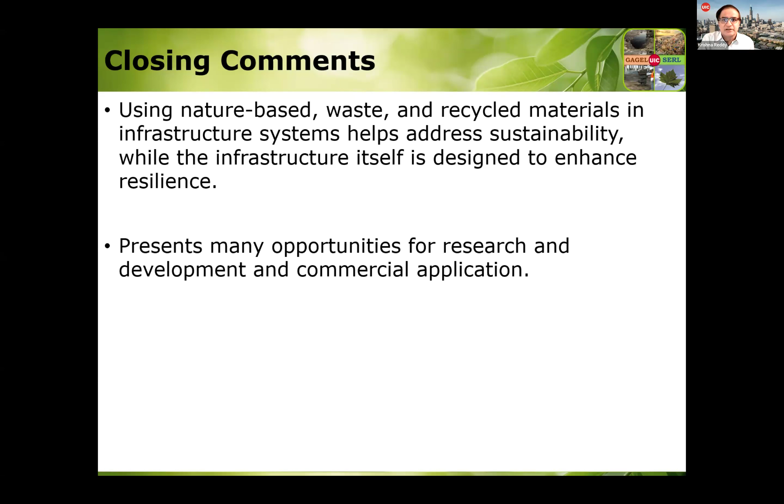So just thinking about this, sustainable and resilient infrastructure is a very broad field that all civil engineers can contribute to. Hopefully my presentation gave you some ideas on what is important, and you have taken away some lessons for your teaching classes, or even doing research, or if you are in a consulting business, hopefully you got an idea on looking at the projects through additional design criteria of sustainability and resiliency. Okay, thank you very much.